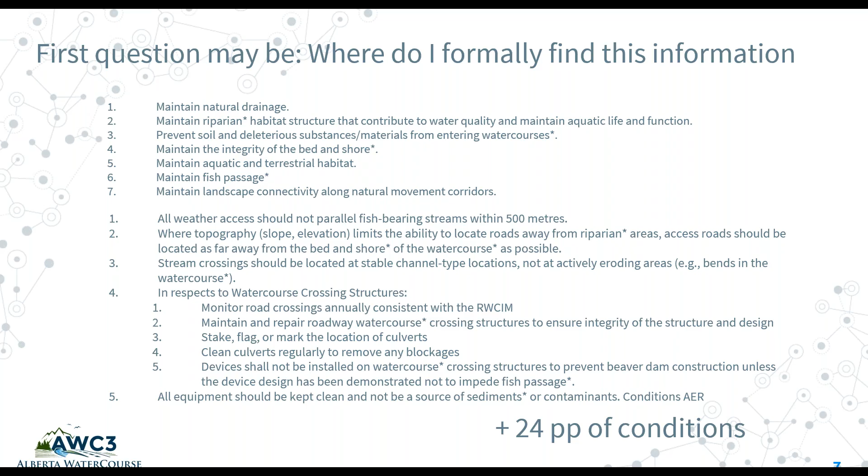So essentially, let's get started. How did we get here? The reason fishery is in this state is because the crossings we are dealing with are failing. While they may have been put in correctly at the time, they have generally been poorly maintained and are not meant to be long-term. The results are that they become hanging, broken, and barriers to fish passage, and they interrupt or stop ecological flow.

Moving forward, we have to utilize different crossing types. We have to install new crossings better, and we have to conduct regular maintenance. And culverts too, they're not going away.

So a brief culvert hydrology lesson. Again, not an engineer here, but creeks are dynamic and constantly move, while the roads we make stay in place. So the watercourse crossing we develop pins the dynamic creek in place, and in time this becomes a point of failure. As Mike Bender pointed out in his presentation, the crossing location serves as a point where downstream movement of sediment becomes deposited above the crossing at the intake end, and the increased velocity of water through the crossing erodes the output side. So this overall process buries the intake end of the pipe and it perches the output end.

So if you think of the creek as a ribbon or a rope, you can think of a poorly installed or maintained crossing as a pair of scissors that cuts that rope. And while this is happening to creeks and crossings, the traffic for the most part keeps moving above, and we don't get out and we don't look down to see what's going on. This next photo is a crossing in west central Alberta that we replaced. It's a 1,000-millimeter pipe with an intake 22 feet buried in silt, about 18 years of buildup, and this is an Arctic grayling creek.

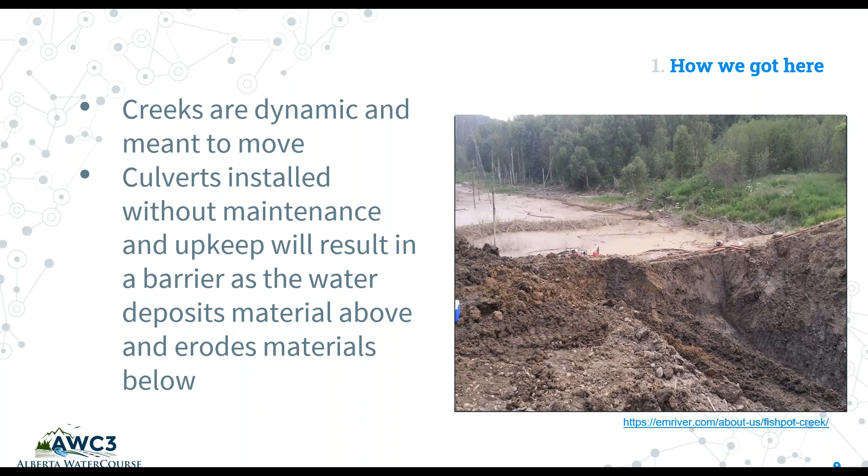So moving forward, as long as we don't install crossings in the same manner that got us here in the first place, we'll improve the situation and change the trajectory that the provincial fishery FSI has been on. In essence, we have to change the way we design, install, inspect, and maintain these culverts or crossings, culverts or not.

So a little bit about site selection. Regardless of the reason for the watercourse crossing fix, ecological best management practices have to be employed for all the crossing works, so emergency works does not mean no mitigative measures. In an emergency repair, you often don't have time and space for all the planning of all the eventualities, but the care given to fishery and water management has to be the same, and the QAES or the ecologists need to be involved to help this aspect be properly managed.

Also, you'll have less interaction or engagement with the regulators because of the nature of the event, but keep them posted on the process used and the results from the works that you do. And just because it's an emergency repair doesn't mean you cannot add some functional ecology to the product with a few good measures. This is what we're going to talk about, such as riparian restoration and channel roughness.

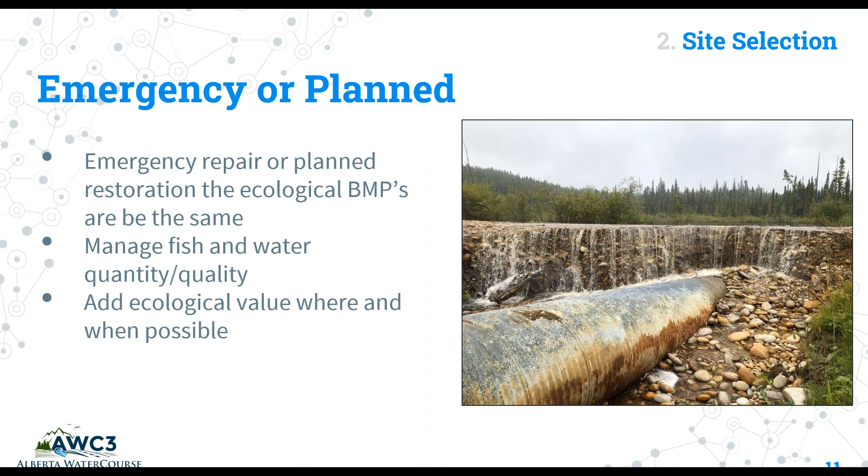So if it's a planned restoration, just a note here: ensure you're selecting the site with the most ecologically beneficial repairs. You want to aim to work on high priority watersheds, high volume streams, and projects that will connect lost or isolated habitat and lead to contiguous stream reaches. Try to ensure there are no other anthropogenic barriers downstream.

If you're directed to restore a site, you should try to confirm it's the best use of your resources. This could be tricky and require a lot of collaborative effort with your regulator and even with your neighbors. But at the time of the emergency facing our provincial fishery, there's really no value in wasting watercourse crossing dollars on a site of low value. So if we're going to spend money, we want to make sure it's the best value crossing.

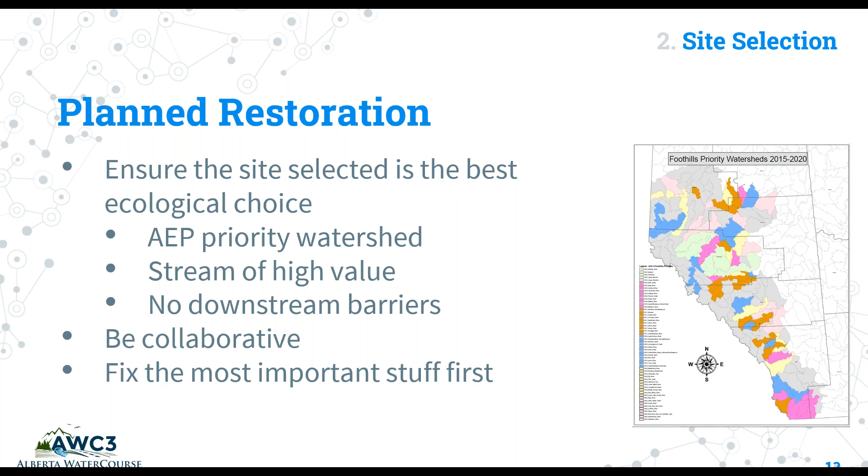So this is where we'll start to spend time. We'll start with site assessments. Now you're going to step into the creek, and I trust everybody knows the equipment and gear you're going to need to do this.

The very first thing you have to be aware of, and this is a new best management practice, is you must decontaminate for whirling disease. If you've been in or around any of these affected watersheds and watercourses, this will be a stated condition of works coming soon in the updated master schedule. Check the map online for the decontamination zone.

If any of your gear or machinery has been in them, it has to be cleaned and decontaminated. This includes your contractors and their machines and gear, their rubber boots, hip waders, everything. Make sure everything is decontaminated, dried off, washed off. As Albertans, Canadians, and the world, we're getting really good at decontaminating and understanding the spread of what an unwanted disease can do, and whirling disease has the potential to do vast damage to our native trout fishery.

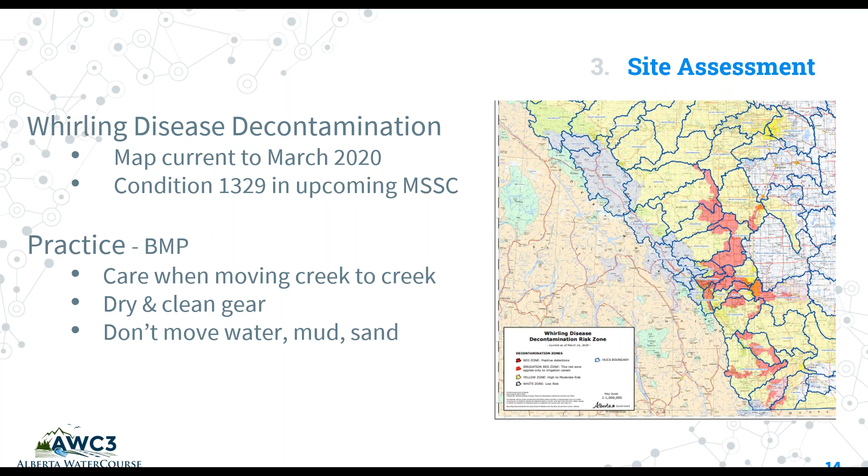So you need to plan your visit to make sure it's efficient and comprehensive. Make sure you collect all the crossing data, stream reach data, habitat criteria assessments, and other information to support all the regulatory and planning work. Much of this is qualitative and can be subjective, so take some photographs.

I recommend doing a grade survey at this time through the crossing site. This determines your crossing depth and your creek channel rebuild depth. I'll touch on that in a minute or two.

Do an assessment of the stream's habitat features, as this is what you want to recreate. Determine the ratio of pool, riffle, and run, and the approximate sequence of what should be at the crossing location you are fixing. Should the area become a pool, or is it in the middle of a long run? These are questions you'll have to answer.

And technology is great. If you can get a drone shot or an entire series to project the area into a 3D point cloud, life is much easier. Also, at this time, it's never too early to...

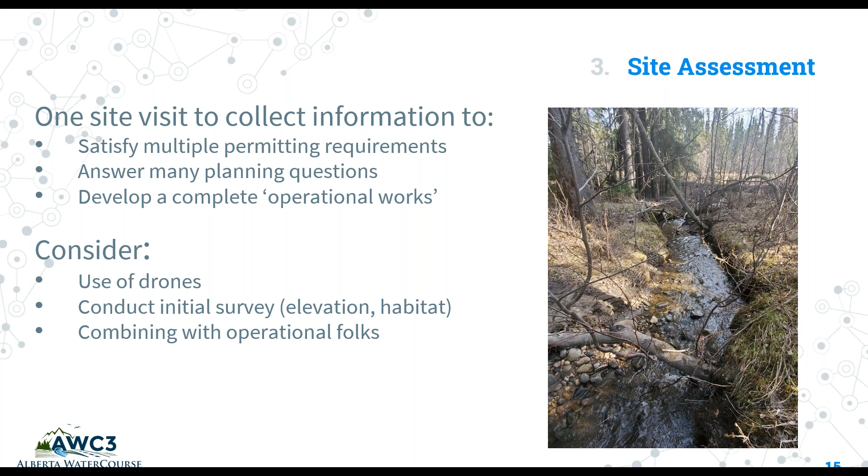...meet on site with other watercourse crossing team members. Everybody within the job has their own agenda to fulfill and to care for, so starting to cross-pollinate ideas early makes the job go easier.

Another technology plug here about drones: I can't emphasize enough how much one good photograph and the perspective it gives to the crossing that you wouldn't get otherwise. Every group of the watercourse crossing construction team will benefit from a good photo. Ian Sharp gave a really good presentation on getting very techie with drone stuff, but even one simple photo can go a long way.

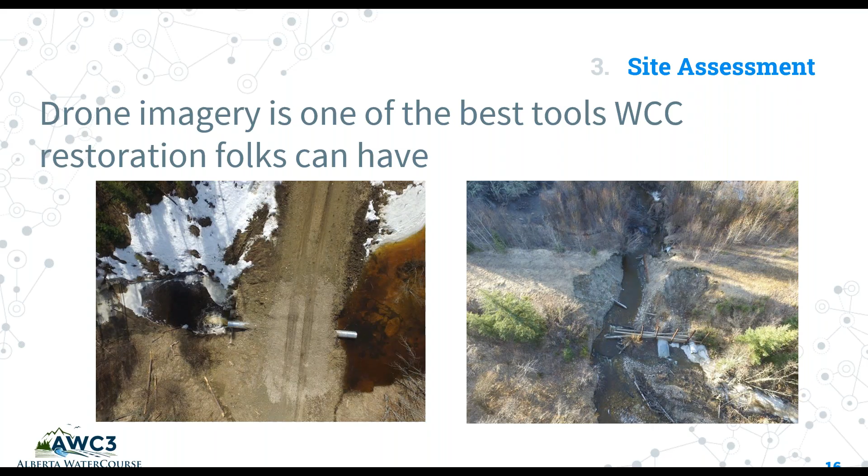So you've collected your site data, and now you're going to make your site plan. You need to share it with the client and regulator cohorts and get some feedback. So now you develop your plan, or your works, as I like to call it, and how this will unfold.

This is what's been missing from watercourse crossing construction jobs for too long. We need to start putting more thought and energy into returning ecological function quickly to watercourse crossings. And when I say quickly, it's a relative term, because what we can do in a day with a 320 excavator could take Mother Nature 25 years or more to recruit naturally. It's an awesome and rewarding task, and you get to design how you will maximize the ecological return to the construction site.

Our objective here is to improve the stream's ecology. That's a best management practice. Stream ecology can be broadly divided into biotic and abiotic factors. You have a lot of control over the abiotic factors during the construction process, so you have to maximize this potential and use the site and the process to recruit ecological features or attributes.

At this planning stage, you're able to artificially recruit natural features that would take the stream decades to do under natural processes. Knowing full well your stream restoration efforts are going to naturally evolve and move once you complete your task, you can immediately negate any good work or the best of intentions by not managing the key factors you have direct control over, such as flow and substrate.

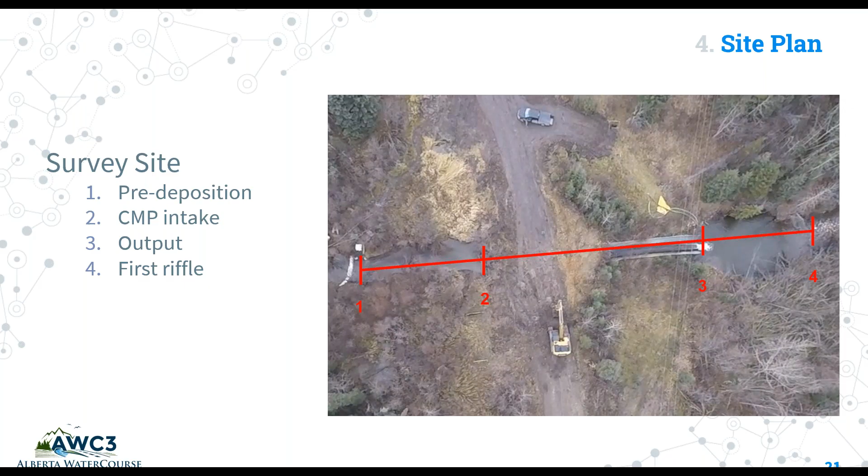I recommend doing two surveys. One is your transit survey, which can take as little as an hour. This determines your elevations, the key points, and your final grades. But you also want to do a stream reach survey, and this is qualitative, so you get a good understanding of what type of channel and reach delineations you're trying to mimic or recreate.

One stream reach is generally a series of repetitive habitat features: a pool, riffle, run. That sort of equates to one reach. A reach can be 20 meters or it can be 200 meters long. It's highly variable. We're talking small permanent streams here, approximately.

Where does your crossing location fit into this picture? It's important because if you're beginning at the end of a run and you install another run, your watercourse will have to auto-correct in time. But you can prevent this from happening by stopping that. Again, all of your work is temporary because the creek is going to move.

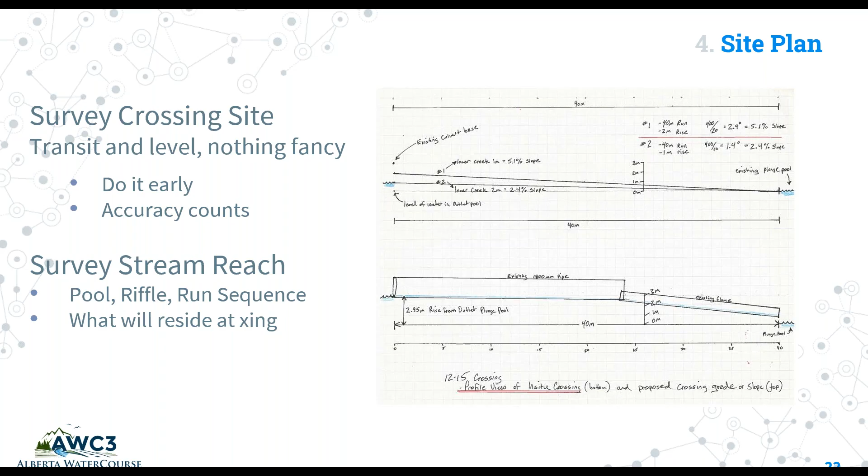Planning to build a foundation. If you're installing a pipe, then you're building a proper flat bed of crush that's embedded well below the channel depth you've calculated. But if you're building a creek, you'll need to do some planning.

Perhaps there is a stream foundation already there, but perhaps it was removed during installation 10, 20, or 30 years ago. This is most often the case and very common. And if it is, you need to recreate it.

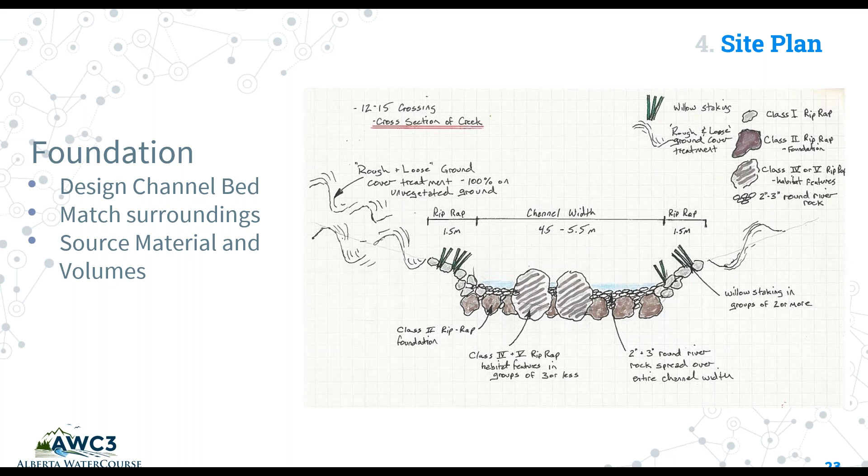Planning your foundation, you need to let your owners buy in or understand how to do this properly, because it requires material. You want to move this material in layers: biggest material in first, second biggest second, smallest on top, and a smattering of other attributes to put on top of that. Plan this for the entire length and width of the crossing that you're dealing with.

And you want to add habitat features. Plan the macro habitat features spatially. This is the large stuff - where to put large rock in relation to one another to provide resting cover and channel roughness.

Plan the actual creek location spatially as well - straight or curved. Any design that is off of linear is going to increase the roughness of the stream channel and can benefit all aspects of the natural development of the stream.

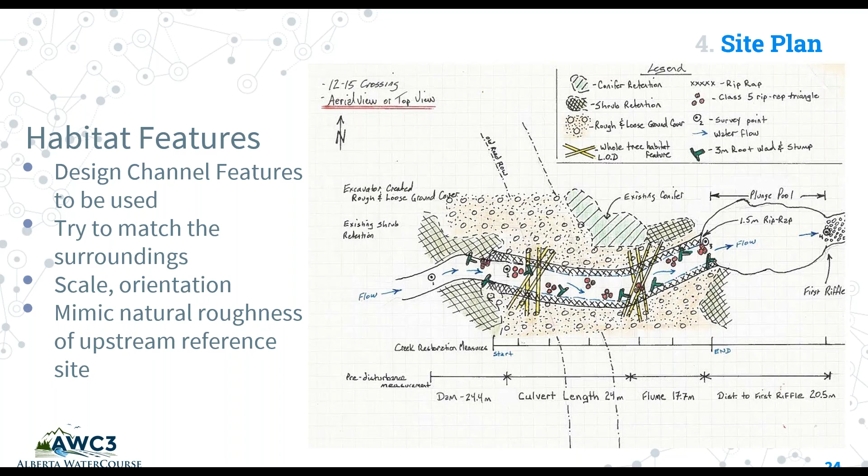So what is channel roughness? Essentially, smooth is bad. Smooth channels lack cover, they speed up water velocity, and high water velocity increases scouring and erosion, and it impedes upstream movement of organisms.

Channel roughness is exactly like it sounds. You want to make the new creek channel or the inside of a culvert rough, bumpy, and angular. It's accomplished by installing imported materials such as rocks of varying sizes. Angular rock is better than round as it gets tied into the surrounding quicker, and angular is rougher just by definition.

Baffles in large pipes are a form of engineered roughness. They're expensive and can be cumbersome, but in small culverts, when they're needed at 1,500 mils or less, it's difficult to move any material into a pipe. Non-linear channel locations are rougher than straight ones.

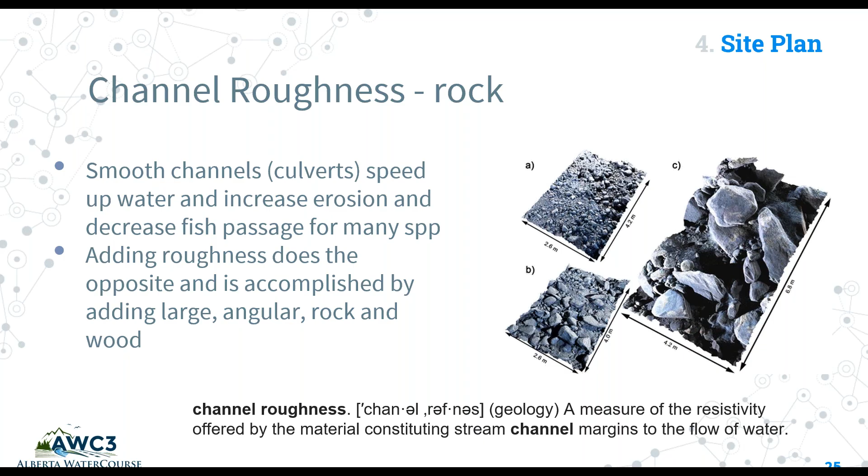Channel roughness can and should also be accomplished with wood. Wood is good, and it never gets used. I rarely see it being used, and it's dramatically missing from channel restoration.

Woody debris, or LOD, large overhead debris, is the second part of habitat features that's going to aid in increasing channel roughness. Woody debris in the creek adds nutrients, organisms, regulates temperature, provides cover, adds primary production, and increases roughness.

You do this on site or maybe via one of your neighbors, like a forest company. You do need a TFA if you're sourcing your own. If you're doing this, it can be confusing. I've gone through this numerous times. You're asking for generally a whole tree. As folks are not used to permitting this, they generally might think you're looking for something like a Christmas tree permit, the TM66, I think it is, but it's actually a TFA, a temporary field authorization.

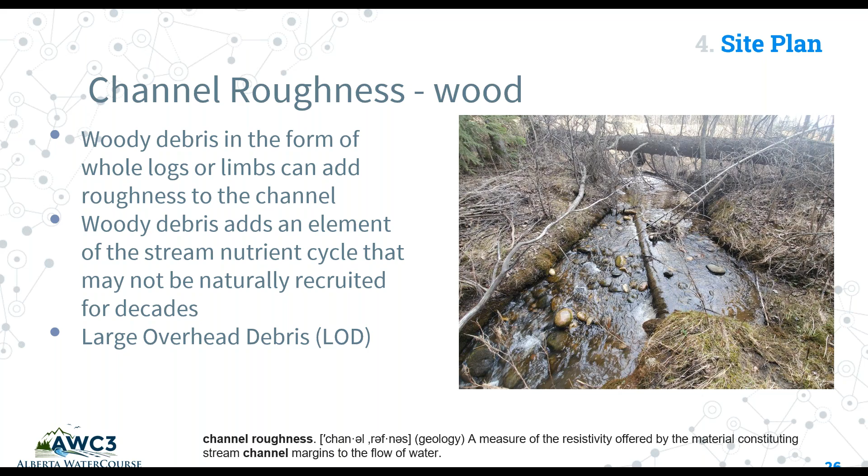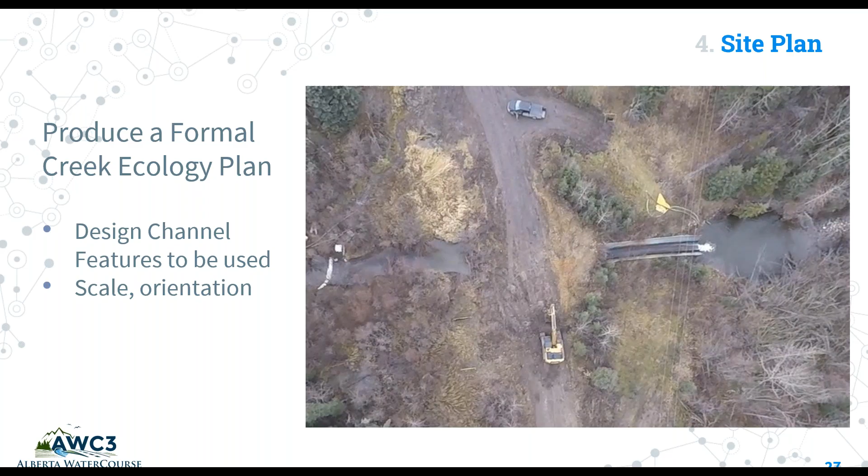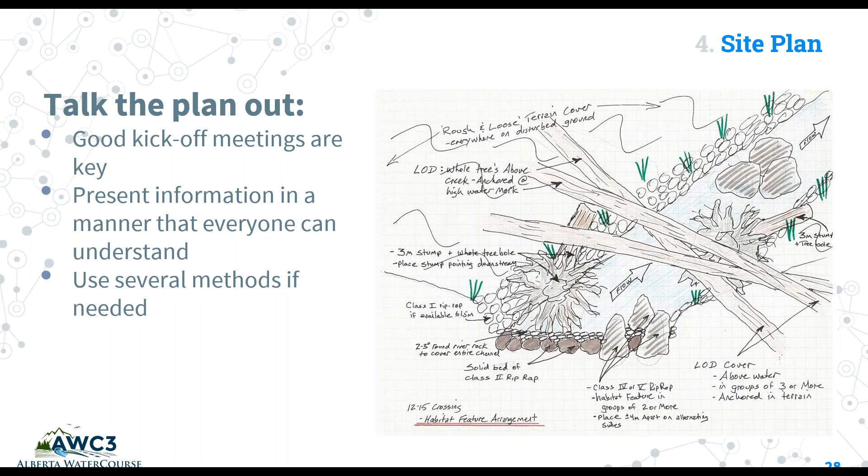Note that not everybody learns at the same scale and method on the team. You need to use several approaches to get the message across about what the desired end product is to look like. Thorough discussion, use a whiteboard, use pictures, walk the site with them, make sure everybody clearly understands what the desired end result is to look like.

So now we get to implement the plan. These are roughly the steps you're going to go through from an ecologist perspective to get the work site ready.

A strong team meeting. You need to deal with the fishery. You need to help or deal with dewatering the site. You may be assisting with the crossing structure, perhaps not. Could be a removal, a new site build, a new installation. Creek reintroduction is a key step requiring ecological input, as is monitoring once completed.

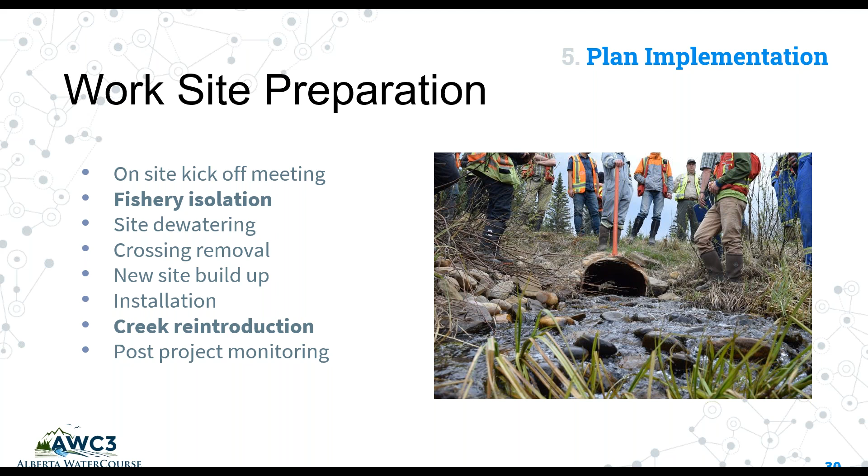So to begin, you isolate and salvage the fishery. Again, noting to wash all of your in-stream gear. A pressure washer is fantastic for this. Depending on the site, you may have to start your fishery isolation several days before.

I like to use layers of fencing because fence gets so jammed up with floating debris. Your furthest upstream fence I usually make out of chicken wire with 1-inch mesh, and then you move progressively smaller to 1/2-inch mesh. Best management practices state a 1/4-inch mesh, which is crazy small, and it gets jammed up instantly. If this happens, the fence is pulled over and you may have to redo it. You'll be setting G-traps or minnow traps to passively catch fish while you're doing this and overnight.

These are usually baited with cat food. Oysters work good too. And then you're going to be electroshocking at the end of this prior to the works starting and prior to dewatering.

I can't emphasize enough how important your fence maintenance is. You do not want to leave these things unattended. You may think you have a site defished, and you go upstream, downstream, and you realize your fence is bowled over.

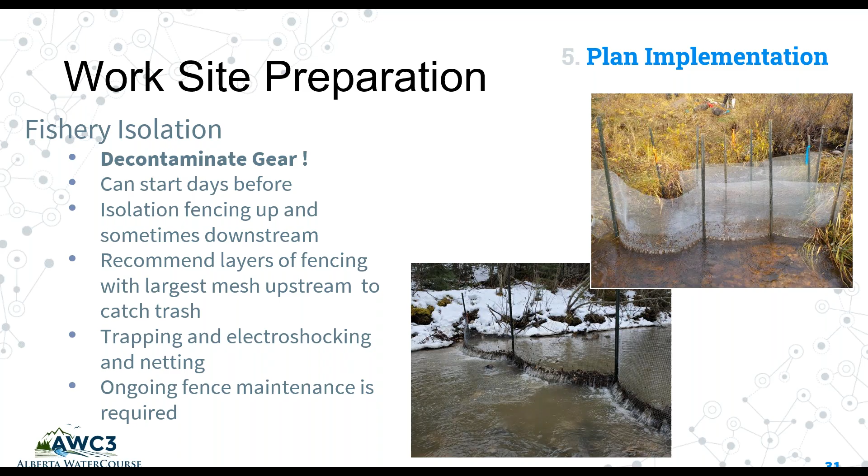Now you've isolated the fishery, caught or salvaged them, and need to move them off site. You have to make sure you've applied and completed a fish research license, or FRL, for the site. Document all your FRL data for each individual and upload that. I recommend a good photo system where you simply arrange the fish with an identifier and take a photo.

You really want to minimize handling of the fish, both the physical hands-on handling and overall timing. This means minimizing time from capture to release. Ideally you have someone to process fish as they are captured and release those upstream of the works.

So now the fish have been caught and the pumps are running, and it's time to dewater the creek. This is your last fishery salvage, so you have to make sure you get down and visually inspect all the holes for any species that could be hiding or remaining.

When the water gets low, it's their nature to push into the corners, and they can be hard to find sometimes. Plus as the water gets low it gets very murky. So try and let it calm down, and you'll watch the edges and see these small fish trying to go somewhere that they can't.

Get one of those small aquarium nets, those little blue ones you catch your goldfish with. They work really well at this stage.

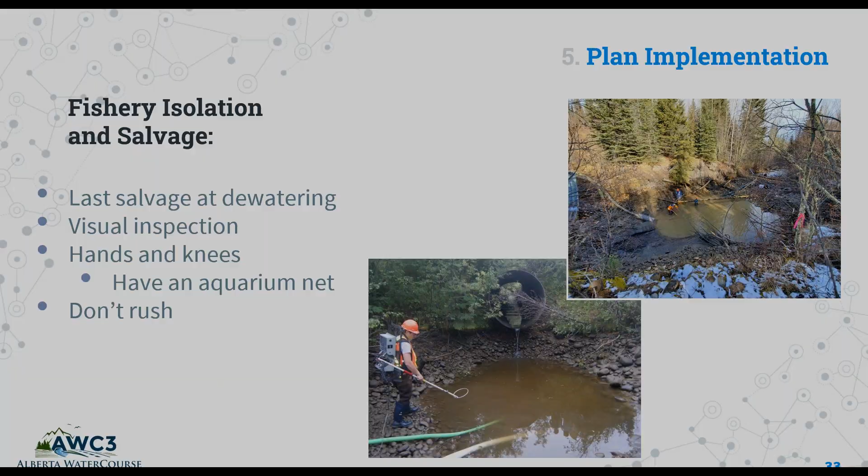Fish handling again: don't be rushed, and don't be shocked if you get hundreds of fish. Also don't be shocked if you get no fish. Regardless, it takes time to process.

Handle them as little as possible, hence a good photo system. Your project managers and construction managers need to give your QAES and bio team time to handle and process the fish properly. This is a stated best management practice. Please don't rush these people.

I also recommend black buckets, just my own findings here. They work to keep fish calmer. Use lids and mesh tops if you can.

Also, late season isolation and salvage is tricky. You'll have to find a suitable hole to put these fish into. Moving them upstream of the works is not always possible, and I recommend avoiding this if you can.

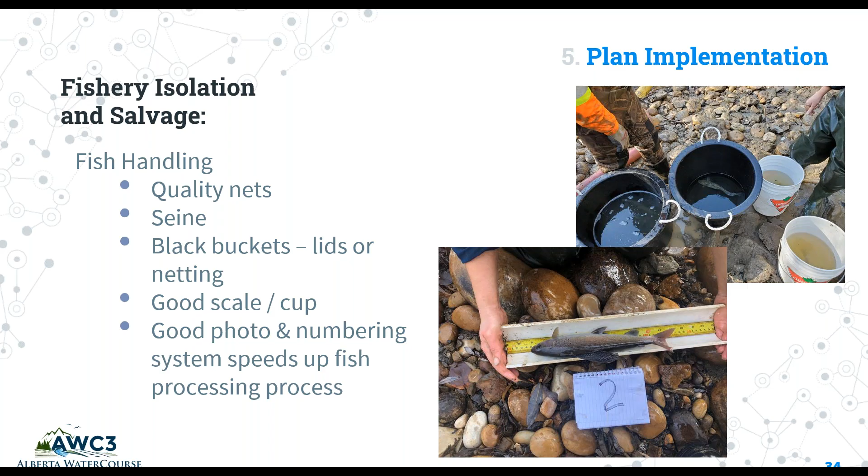So just a note or two about dewatering. It's not always an ecologist's task, but you do have a role here to help ensure quantity and quality is maintained. This is a BMP.

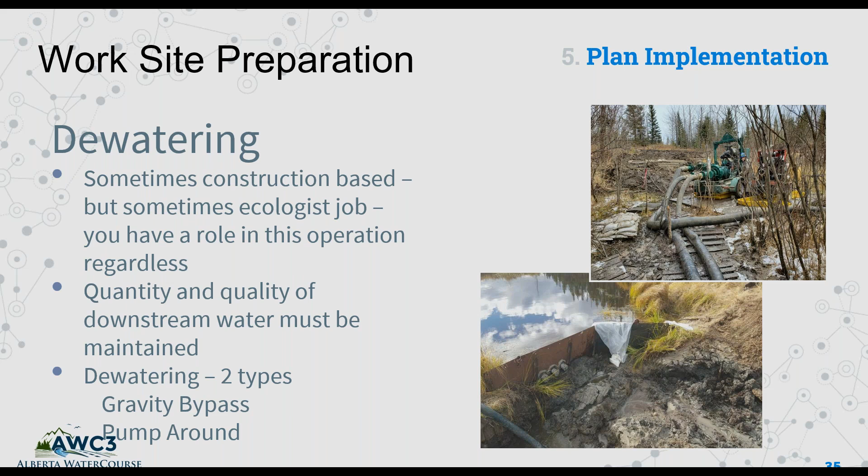There are two types: dam and pump, and bypass. I recommend bypass if you can. Dam and pump is more common.

Often with a bypass, you'll trench in a pipe or trench and line it with poly. If you can, use a second existing pipe on site. In the eastern slopes, that's often the case, where there are 4, 5, or 7 pipes in a roadway. Choose one of them if you can for a bypass and divert the flow through there.

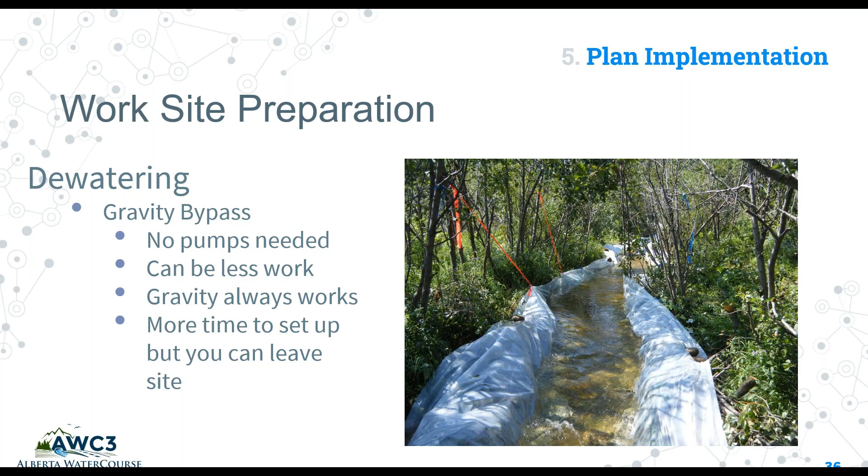This photo here is the entire Pine Creek going 220 meters through the bush in one long singular roll of poly, so you can get creative at this point. But you want to dewater as small a stretch of the creek as you can, and it's also less work to do so.

Managing the construction water is ongoing. Maintenance of downstream water quantity and quality is a BMP. Bell holes that are 2 or 3 big scoops at the intake and output will capture this water for you.

My standard practice and BMP for culvert work is to wash the mass of deposited sediment accumulated above the crossing site through the construction project area. You capture this in a bell hole below the site and pump it off site onto the terrestrial area where the sediment can settle out.

You do this while reintroducing the stream to the construction job, while the bypass is still flowing. Use a portion of that water, 20 or 30% of the creek flow, to saturate the works and move the sediment down to the outlet bell hole where it's captured and pumped onto the terrestrial. This can take many hours to do properly, but it's well worth the effort, and it's the best management practice.

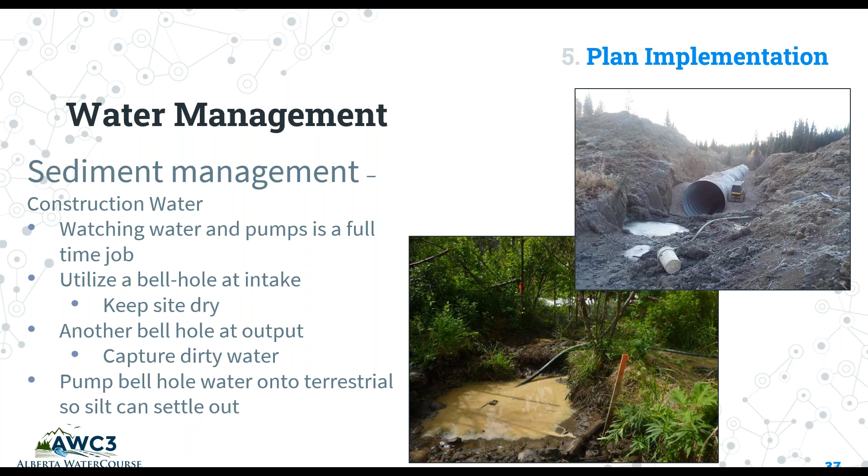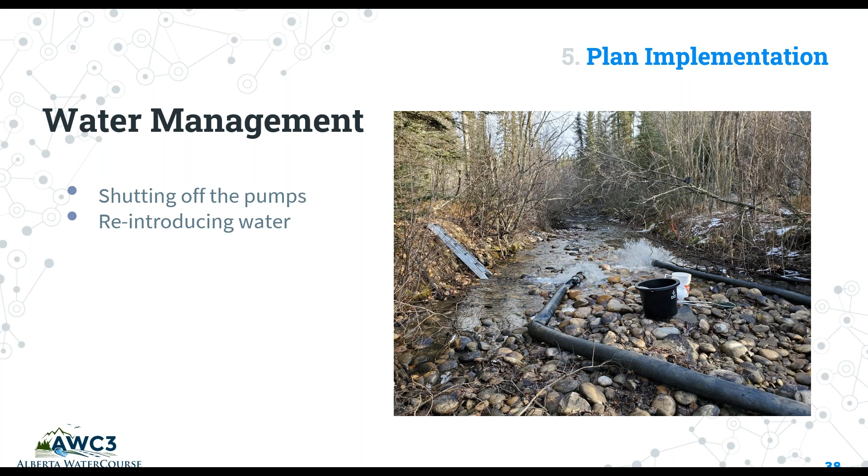Now you're going to reintroduce the creek. Depending on the site, this can take several hours or even longer. Don't open up the bypass or shut off the pumps and let the creek flow until the water moving through the works is running clear. Note, if there's a big plunge pool that has to refill with water, you have to run the bypass system for a long period to maintain the downstream flows while the scour pool fills up.

We'll discuss vegetation clearing. This is a current best management practice to establish or reestablish a functioning riparian community. First of all, take it easy on the clearing at the beginning. Communicate this right at the kickoff to any crews who may be going to site prior to the works, and salvage what you can to use it on site afterwards. Willows and shrubs, even tree transplants can work well if they're done properly.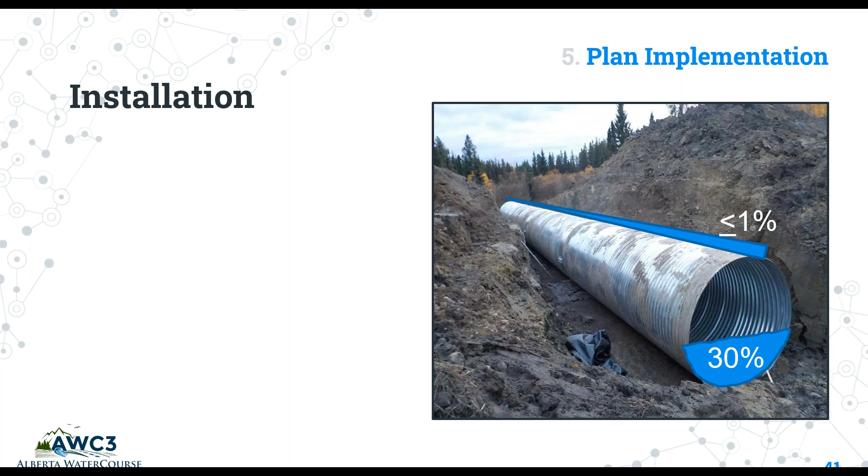So now we're restoring a creek bed. Determine your channel depth and excavate to that level. If you find the old channel, great, follow it. If you can't, you have to build a new one. Define the edges, straight or curved, and try to match the natural creek if you can. Line with larger rock if you're able to.

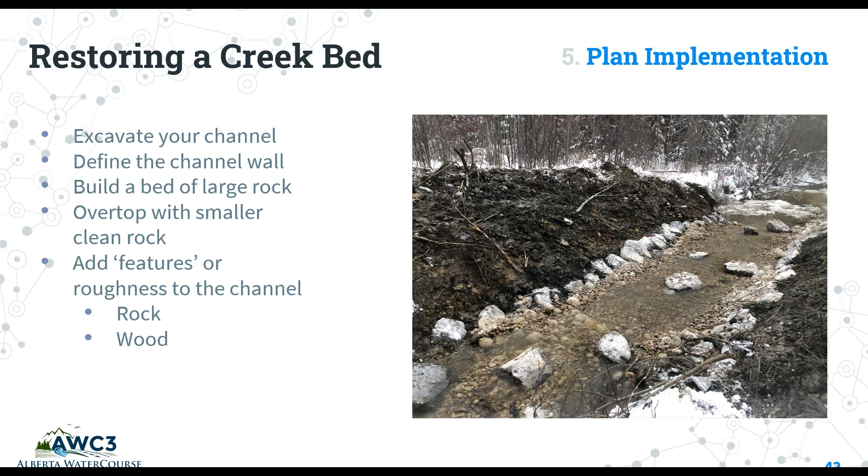Class 3 is great. Create a stream bed of layered rocks, large angular down for the foundation. Class 2 works great for this. And then you fill the top with 2 or 3 inch rounded clean river rock. Then you want to add roughness, but be gentle with the roughness. Throw trees on it, root wads and all. Again, remember you're permitting.

On large creek channels, you do all the work at once as you progress down the channel. You can see in these photos all the stages are there: excavation of the final grade, importing the foundation material, and overtopping with our river rock and our macro features as well.

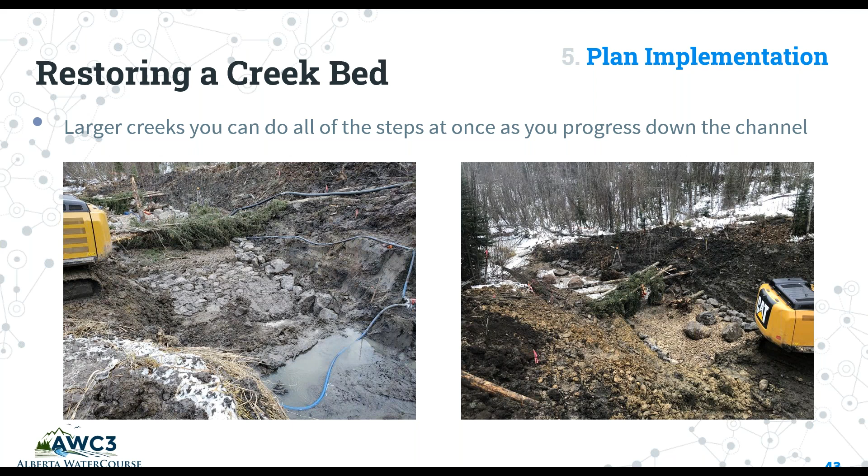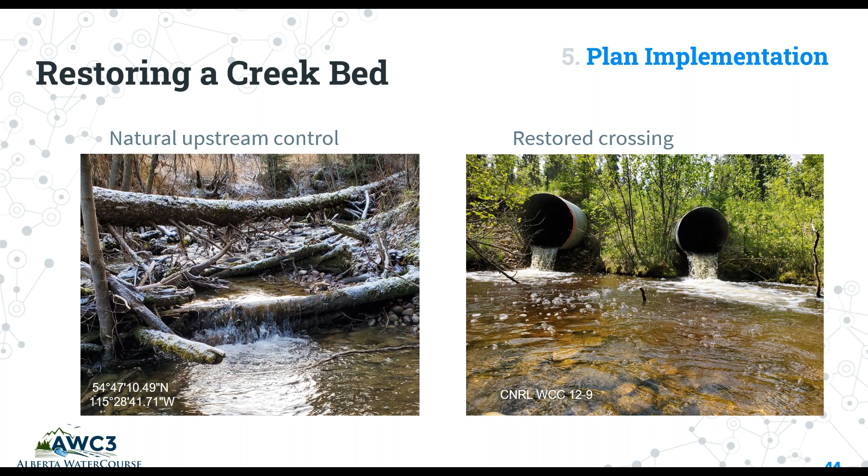So here's an example. This is a site CNRL completed in 2019 in the Swan Hills area. The left picture is a natural control upstream of the crossing area. The photo you see is the double hanging pipe. This is an Arctic grayling creek. And this is what it looked like 2 days later. This took 1.5 days from the time those pipes were removed to it looking like this. So it's very possible and not difficult to achieve.

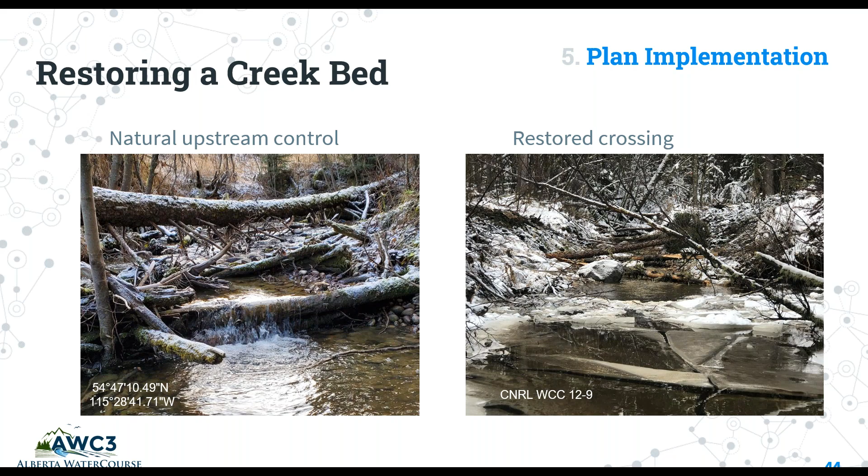Again, don't overclear. Communicate the importance of mature vegetation to surveyors or operators who may want to clear the materials. This is the way people are used to doing stuff, and we have to change that way.

Work with willow staking, start that early. Collect lots of clippings early on in the works and soak them in the creek. Basically you want to work with 1 meter long whips as your smallest, about the size of your thumb. You can plant anything, willow or poplar, they'll all take when you ram them into a riparian area. I highly recommend you take this course if you're able to, or read this book if you can get your hands on it, by David Polster on bioengineering. It has everything you'll need to reestablish a riparian quickly on site.

So your overall objectives here: source and replace the macro features to the creek channel, or place them above and below the crossing in case of a culvert. You're managing flow and sediment to the ecological advantage of the crossing. Design what you want to see and build it, utilizing the construction equipment and managing for the key abiotic factors of sediment and flow. The microhabitat will all follow afterwards.

So timing, when's the best time to do the watercourse crossing works? The COP currently outlines restricted activity periods for all species, watersheds, and creeks in the province based on the species' needs. But regulatory best management practices and operational realities don't always coincide, and you can work closely with your QAES and your regulator to have important jobs permitted outside of these windows.

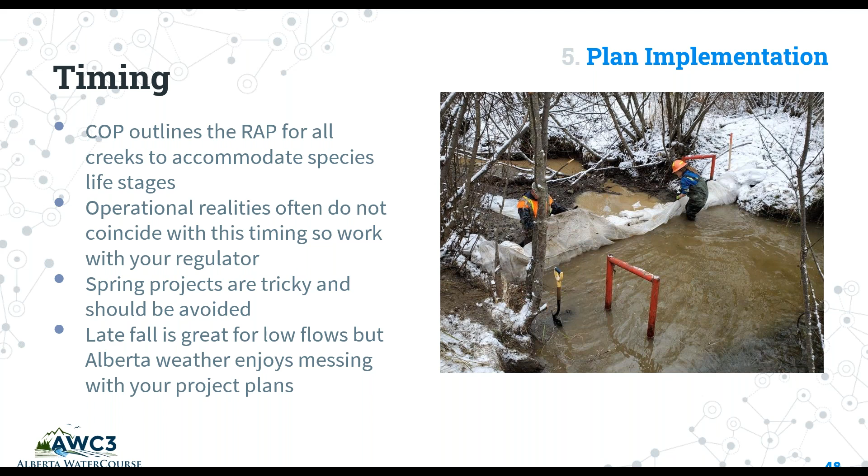Early spring can be as bad because of peak flows and runoff. Late summer and early fall is ideal because of low flows. Late fall gets tricky as weather can change, and you can incur huge dollar increases to your project. You want to avoid some of the scenarios like the photos here.

And the last thing we want to do is monitoring your work. This is a stated best management practice for regular monitoring and reporting. Pardon me, have to back up. A note here so people are aware: the term annual monitoring is being introduced. As an inventory specialist and an expert in inventorying and assessing stream crossings, this is going to be a very difficult task to complete, and this will be coming as a documented best management practice soon.

So annual inspections of watersheds, in high-risk watersheds, is going to become required. So plan your resources wisely and accordingly. You can still fix the problem if you work with your people and your construction resources.

So lastly, you have to check on your construction works. You have to conduct maintenance as needed and report on it. Small fixes will prevent major failures, as all crossings really are temporary.

So ask the regulators about the ecology of the stream and the site. Is the passage restored and are fish using the new channel? An ecological response is going to take years, and it'll be the final say in whether the work was successful. This will be the regulator's job, as it's a landscape level application, and it will drive spatial restoration objectives that evolve over time. Meaning, as we fix one prioritized watershed which has been broken, we need to move on to the next, and so on.